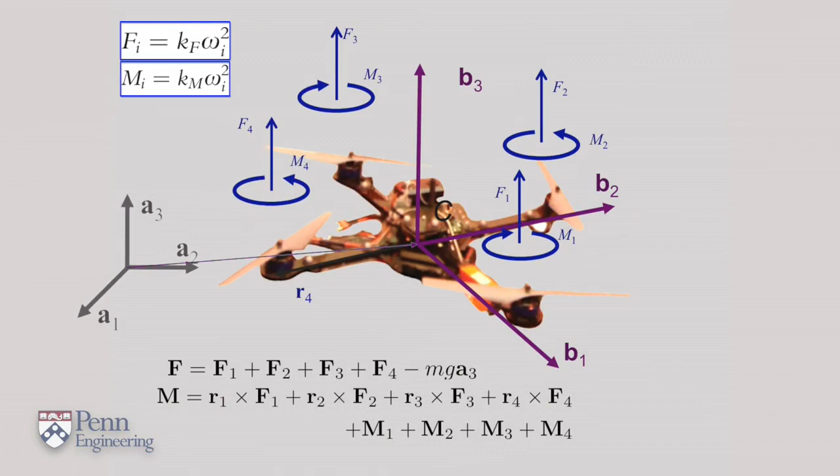Now back to the quadrotor dynamics. The equations at the bottom tell us the net force and the net moment. If we combine the net force and the net moment with the Newton-Euler equations, we get these two sets of equations.

On the right side, you see the total thrust, which is U1, and remember this thrust vector is known in the body fixed frame. The matrix R is rotating this thrust vector to an inertial frame. At the bottom you see the net moment, also known in the body fixed frame.

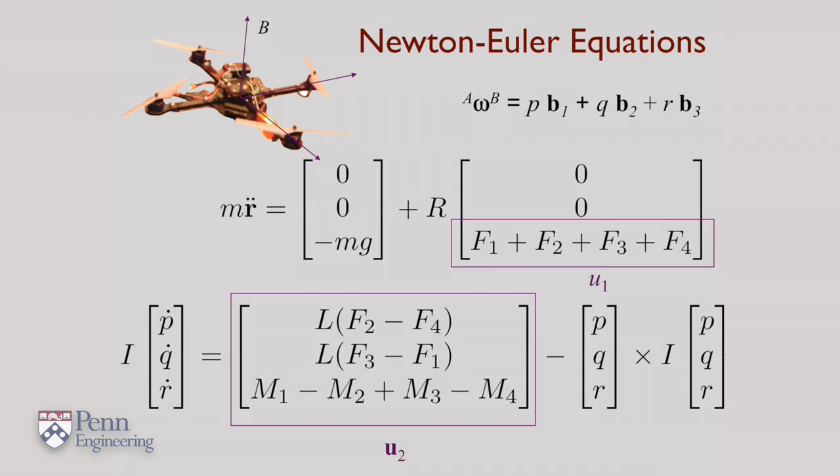But the equations as they've been written have components in the inertial frame on the top and in a body fixed frame at the bottom. These are the Newton-Euler equations, and these are the equations we'll use to develop controllers and planners for our vehicles.

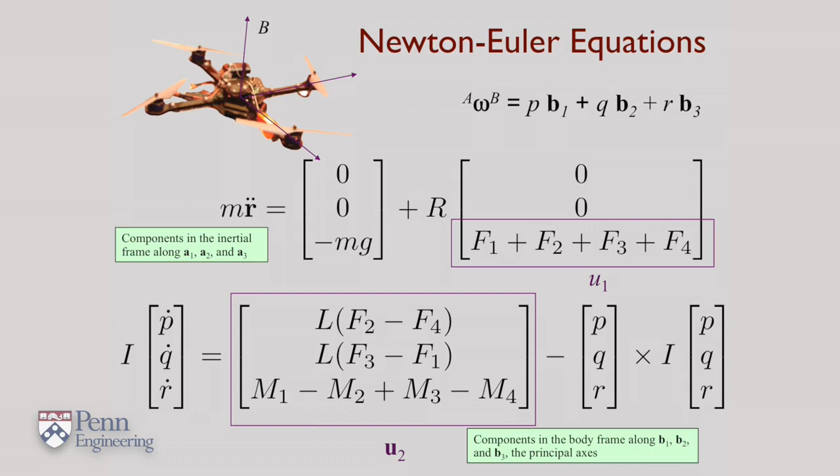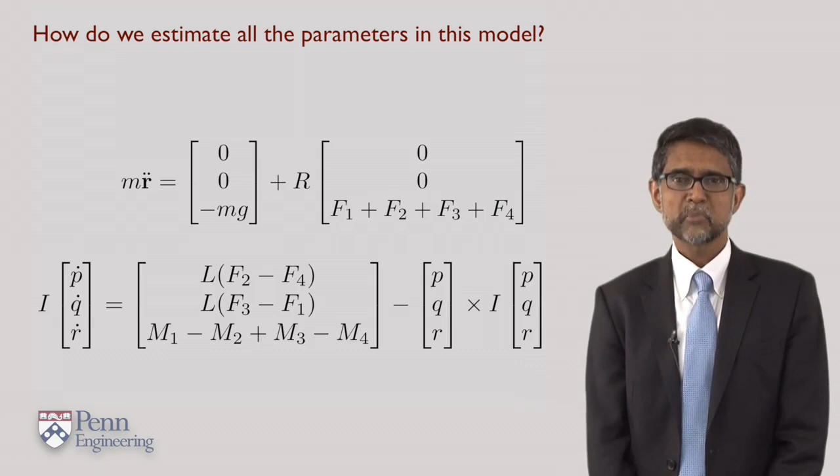One question you can ask is how we actually calculate these parameters. Or in an online setting, how do we estimate these parameters? If you think carefully, the parameters you really need to know are those corresponding to the geometry, the length L, for example, and those corresponding to the physical properties, the mass m and the inertia I.

You can also see that these parameters appear linearly in these equations. So if you had a system that allowed you to measure positions, velocities, and accelerations, it's actually not too hard to estimate the lengths, the masses, and the inertias.

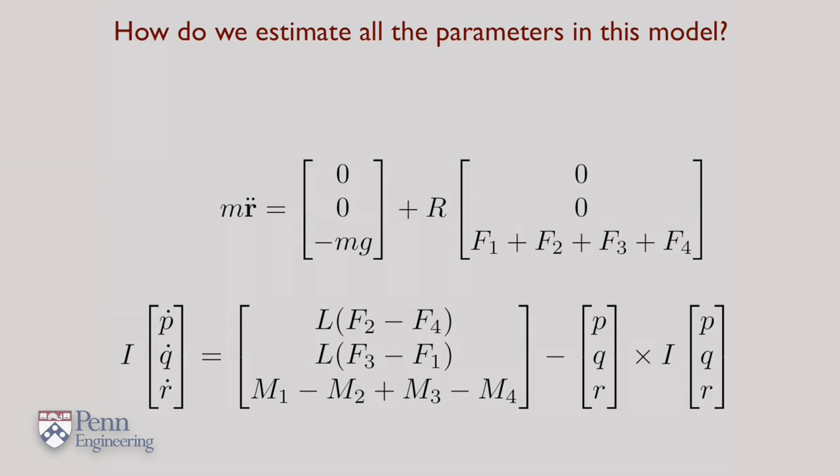You should also verify that it's quite easy to calculate the angular velocity in the body fixed frame. If you know the pitch, roll, and yaw angles, and you know the rate of change of the pitch, roll, and yaw angles on the right side, a simple transformation yields the angular velocity components P, Q, and R along B1, B2, and B3. So this model is quite complicated. It involves three components of position, velocity, and acceleration, three components of rotations, angular velocities, and angular accelerations.

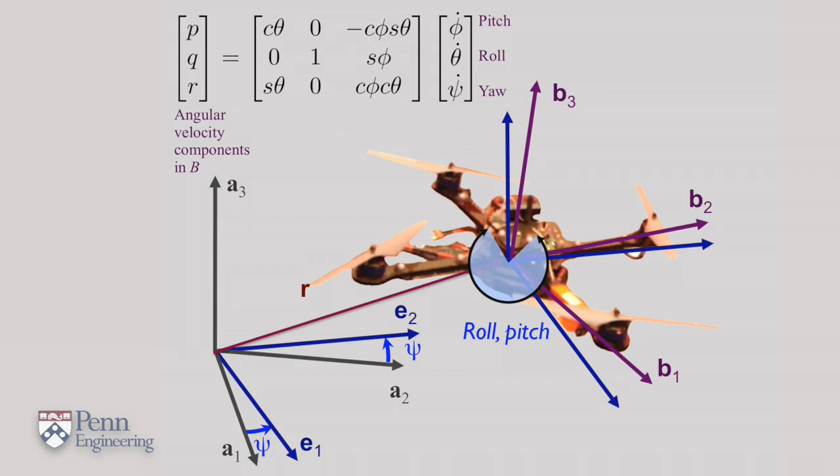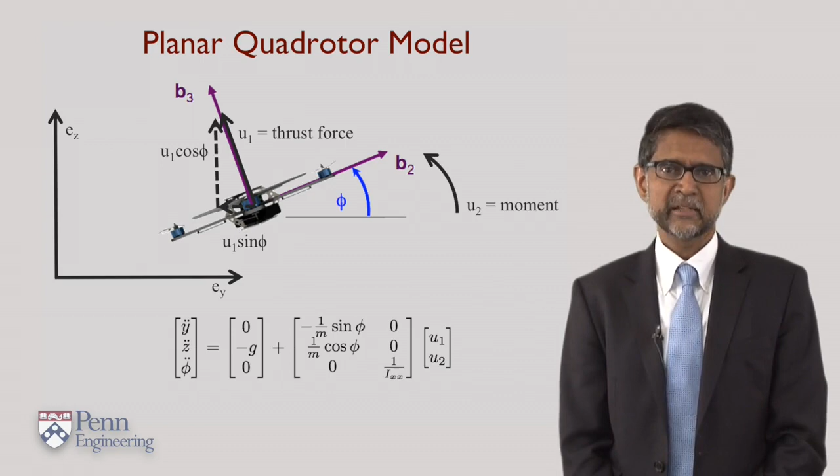To get a feel for the control problem, I'd like to first look at the planar version of this model. So we'll look at the equations of motion in the YZ plane. We will assume that the robot cannot move out of this plane. In other words, there's no motion in the x direction. And we'll also assume there is no yaw or pitch motions.

As a result, we come up with the three equations that you see here. Equations that describe the rates of change of velocity in the y and the z direction, and the rate of change of the angular velocity in the roll direction.

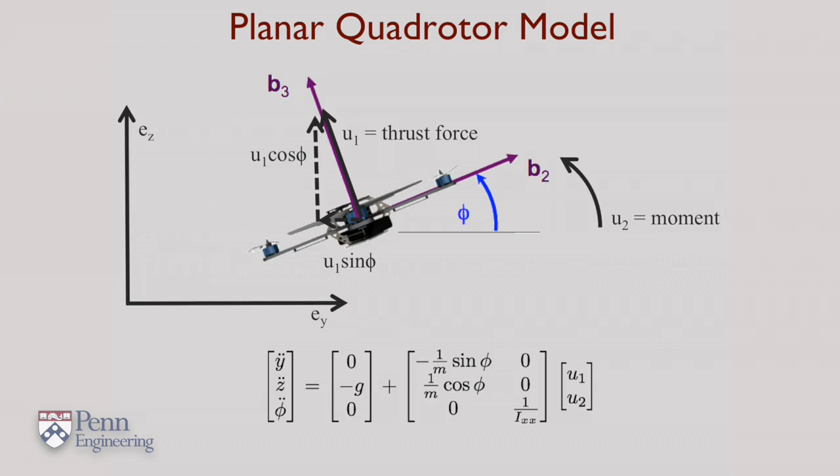To describe these kinds of systems, it is useful to define a state vector. In the three-dimensional case, we have 6 variables that describe the configuration of a robot, and a state vector includes the configuration and its derivative. So if Q is the 6-dimensional configuration vector, Q and Q dot constitute a 12-dimensional description of the state. The space of all such state vectors is called the state space.

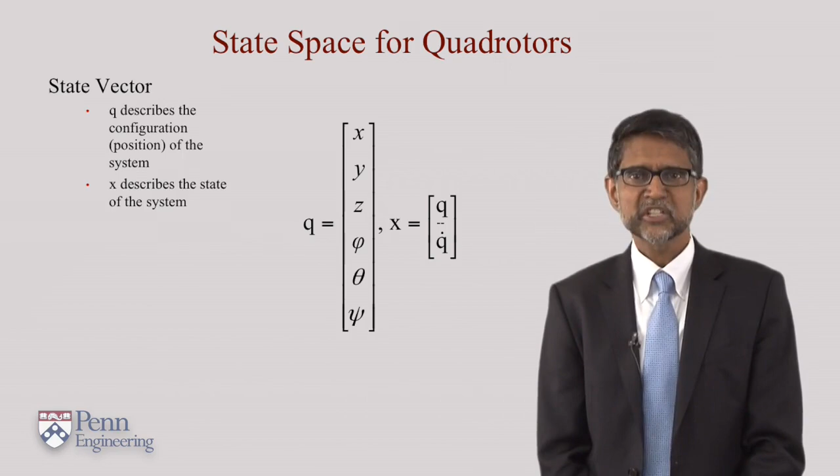If you look at the equilibrium configuration, and that configuration is defined by the position x0, y0, and z0, the configuration by definition also has a 0 roll angle and a 0 pitch angle. It could of course have any yaw angle. The equilibrium configuration must also correspond to 0 velocity.

If I write it down in terms of a state space vector, you have the equilibrium configuration Q sub E, and you have a 0 velocity vector, and that gives you a 12-dimensional vector where the bottom 6 elements are all 0. Similarly, for planar quadrotors, you have a 3-dimensional configuration space, a six-dimensional state space, and an equilibrium configuration and an equilibrium state that can be similarly defined.